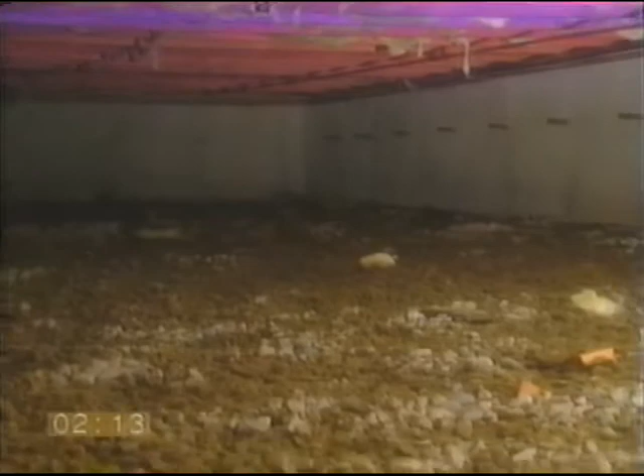For pier and beam construction, make sure the vents aren't blocked and that the crawl space has at least 1.5 square feet of venting space for every 100 square feet of floor space. You'll also need to check for a 6 mil or thicker plastic vapor barrier, either covering the ground in the crawl space or attached to the underside of the floor.

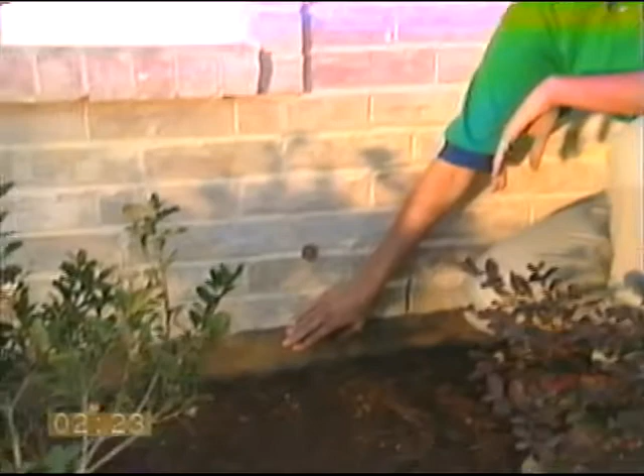Now, a concrete subfloor like the one we'll be working on sits directly on the ground, and because concrete is such a porous material, moisture is constantly absorbed up through the slab. You'll see later how we install a plastic vapor barrier on top of the concrete to protect the floor. On new construction like this, the concrete needs to cure for 60 days, so make sure you factor 2 months into your construction schedule before you install any floor. Okay. We've determined that the conditions are right for installing Pergo in this house. Let's look at our tools.

Now, you'll need a utility knife and a pry bar, a power saw, either a circular saw or a table saw with carbide tip blade, a combination square and a scriber, a hammer and a scraper, some Pergo cleaner, and a bucket of water and cleaning rags. Oh, you'll also need safety glasses. Be sure to remember these and protect your eyes. That's very important. And a tape measure, preferably one with metric measurements.

Well, you're right about that, Jack. It's really handy to use metric measurements because Pergo planks are exactly 20 centimeters wide and 120 centimeters long, and it's a lot easier to do the math than working with fractions of inches. The planks are 7 7/8 inches wide and 47 1/4 inches long.

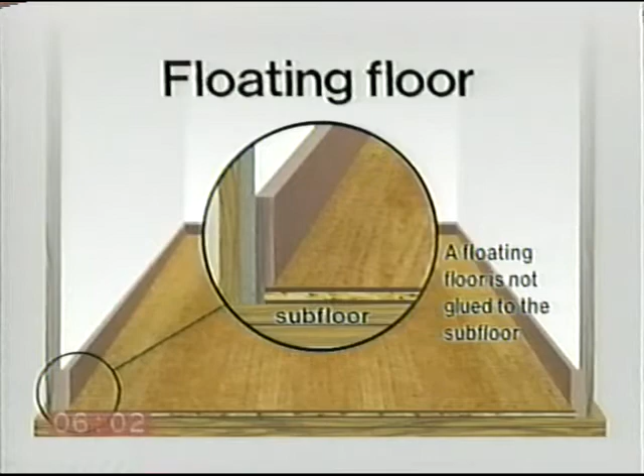The only thing holding a Pergo floor down is gravity. It's called a floating floor, which means it just sits on top of the subfloor. This makes it very easy to install, remove, or repair. And since Pergo is made primarily from wood-based materials, it's always expanding and contracting with changes in humidity. This is allowed for by a 1/4-inch expansion space around the edge of the floor, and anywhere else the floor meets a fixed object. The space allows the floor to float.

Even though this constant movement is imperceptible to the human eye, your Pergo floor will actually travel 140,000 cumulative miles over the life of the floor. He's only kidding.

Anyway, the glue is not used for gluing the floor down. It's used to glue the plank's tongue and groove edges together. And you have to use the Pergo glue for the 15-year warranty to be valid. You're probably also going to need some Pergo sealant or other 100% silicone sealant, and that's something we'll need to talk about later.

Shall we? After you.

We're planning to install Pergo in this kitchen, so the first thing to do is decide which direction the planks will go. There's really not a right or wrong direction. It's just a matter of aesthetics, what looks best. Yeah. So the first thing to do is determine which direction light usually enters the room. Generally, the flooring looks best if the planks are installed parallel to the incoming light.

Now, the exception to that rule is a narrow space, such as a hallway. You'll usually want to install Pergo lengthwise in a hall, regardless of the light source. Since we have these large windows in the breakfast area letting light flood the room, we'll lay our planks in this direction. Now that we've determined that the length of the planks will run the length of the room, let's measure the width.

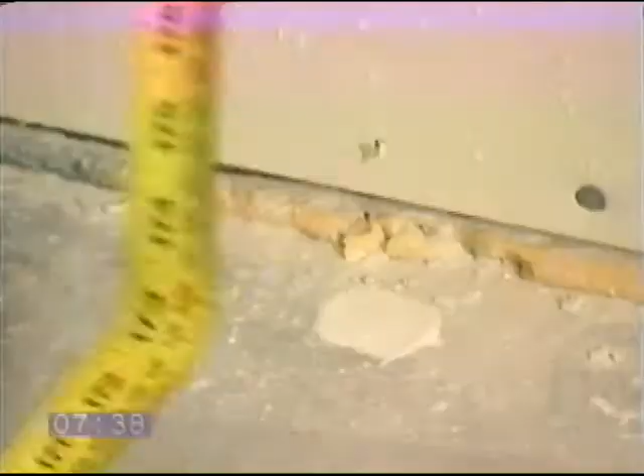Okay, that's 14 feet 9 inches at the widest point. Now you'll see what I meant about how much easier it is to work in metric measurements. So Jack, what's the width in centimeters? Okay, that's 450 centimeters. To determine how many rows of planks it'll take to cross the room, you divide that by the width of a Pergo plank, which is 20 centimeters. A lot easier to deal with than dividing 14 feet 9 inches by 7 7/8 inches.

It sure is. Now, the reason we start out by taking this measurement is to determine how much we'll need to cut off of the planks in the last row. Ideally, you should not have a plank that's less than 5 centimeters or 2 inches wide. If the room measurement indicates you'll end up with a space that's smaller than that, you'll need to cut the planks in the first row so that the last row won't be so narrow.

And at this stage in the planning, you need to decide which trim and finishing components you'll need. Take note of the trim and molding section of this tape and plan early on which strips you'll need. You also need to calculate how many cartons of Pergo you need. To determine the number of cartons, we've divided the room into rectangles and squares. We've taken the square footage of each area, added them together, and then we add 10% to the total square footage, or a little more for complicated floor plans or when laying the floor diagonally. This covers any miscuts and normal waste.

Each carton will cover 20.67 square feet or 1.9 square meters of floor. So once you have your total area, plus the 10%, divide by either 20.67 for feet or 1.9 for meters, and purchase that number of cartons, rounding up to the nearest number.

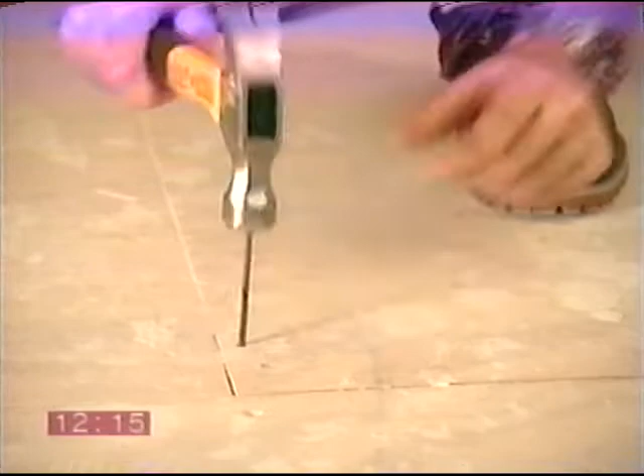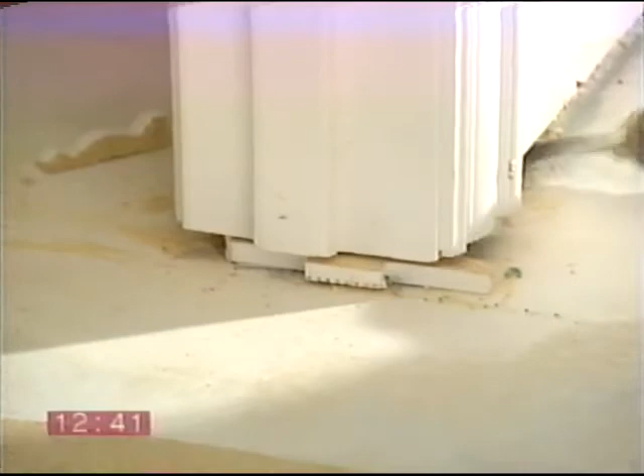Moving right along, let's make sure the door frames are ready. To do this, use a piece of Whisper Walk or underlayment foam and a loose plank placed upside down when sawing, like I'm doing here. Just undercut the door frames and casings so there's enough room to slide the flooring underneath. Since we're also installing Pergo in the laundry room, we've cut the jambs and door stops.

Now we're ready to talk about the underlayment. We Pergo installers really love our underlayments. Whenever there's a concrete subfloor, even if it's covered with vinyl, linoleum, or tile, you must cover the subfloor with a layer of Pergo 6 mil polyethylene film. This polyfilm forms a vapor barrier to keep moisture from reaching the underside of your Pergo flooring. But you should never put polyethylene film over wood or any other organic material. It can trap moisture and cause mold or mildew.

But what if you have hardwood over concrete? I know that you know this, Karen, but it's a good idea to restate the fact that you cannot install Pergo on top of wood that has a concrete subfloor. The wood has to be removed first, then you use the polyfilm as a vapor barrier over the concrete. Just trying to trip you up there.

Now, there is the possibility that there might be too much moisture in the subfloor, so you should do a little test first. Check the moisture level by taping down a piece of polyfilm about 3 feet by 3 feet, or 1 square meter, in 2 or 3 spots. A rubber-backed mat will work too, and wait 72 hours. When you check back, if you see darker concrete under your cover, or if the plastic has become cloudy, or if you see moisture condensation, then you have a subfloor with an overly high moisture content. In this case, ask your retailer or call 1-800-33-PERGO for assistance.

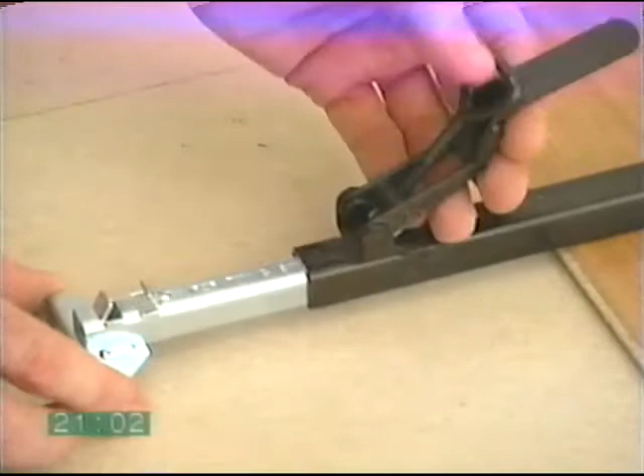This is an installation clamp designed to set up the first 3 rows. At the back of the clamp is a distance spacer. You can adjust this to create a 1/4 inch or 7 millimeter expansion space. And this is the foot, which fits against the plank. In the front is this wing bolt that you can turn to make fine adjustments. The clamp is designed to hold 3 plank widths together.

If you reduce the width of the first row, like we've done here, save the piece you cut off and place it at the head of the clamp on the 3rd row, like this, then make your fine adjustments. Usually you'll use 2 clamps per plank length. Here is the Pergo installation strap. You thread the strap into the ratchet this way.

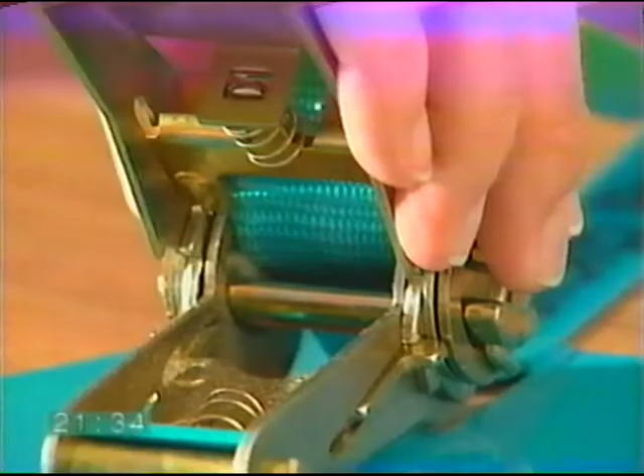Pull the strap tight, then move the handle to create more tension. To release the ratchet and loosen the strap, lift up the plate and move the handle forward. Now place your thumb on the lower plate, release it, and pull forward to the next plank. Once you're satisfied that everything's in good shape, it's time to lay these planks in for real.

Jack, let's get out the glue. Remember, the Pergo warranty is valid only if you use Pergo glue. Just cut the nozzle off the glue bottle so you get a good healthy bead of glue to fill in the groove. Okay, lay the first plank back in place. All right. Remember the spacers on the side and the end. Now, glue the second plank of the first row in place. Don't be stingy with the glue either.

Now glue the first plank of the second row in place. When you press the planks together, make sure excess glue squeezes up out of the joint. Pull the planks together tightly to create a watertight seal. Use the tapping block and a hammer to lightly tap the ends together. It's very important to clean up the glue as you go. Move to the 3rd row. Remember the pattern? And glue the first plank in this row.

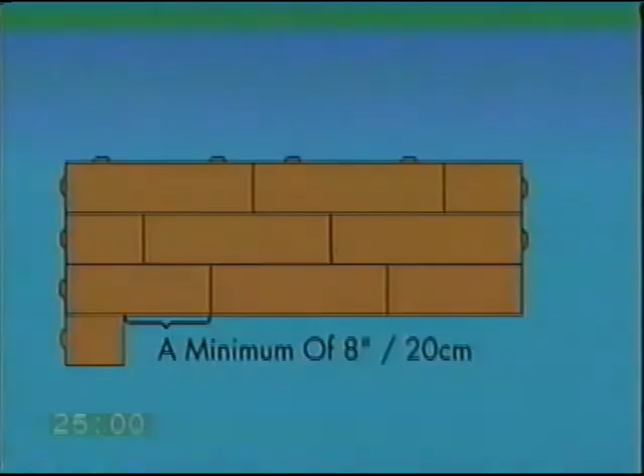Now, before we go any further, we must take care of spaces like this one. This is one of the conditions where Pergo loose tongue can be used. Cut and fit in dry the loose tongue here and here. Then dry fit Pergo planks to the backstop here and to the wall here. Remove the dry fitted planks, glue in the loose tongue.

We use the loose tongue so that we may pick up the plank, see the groove, and be sure that we are filling it up with glue properly. Otherwise, we'd have to fill the groove from the floor, which is awkward. Glue and fit each piece into place using the installation straps to squeeze the joints tightly together.

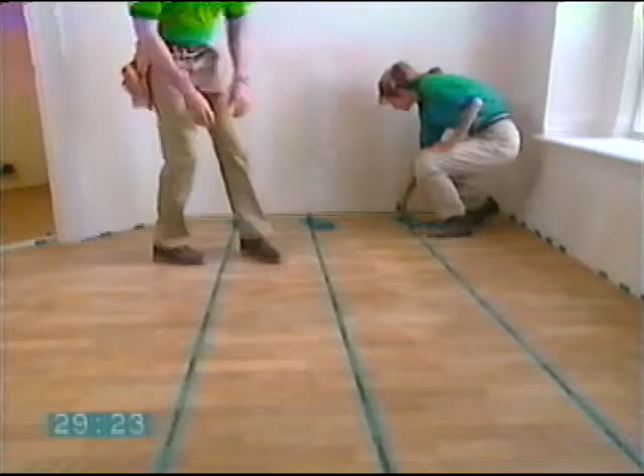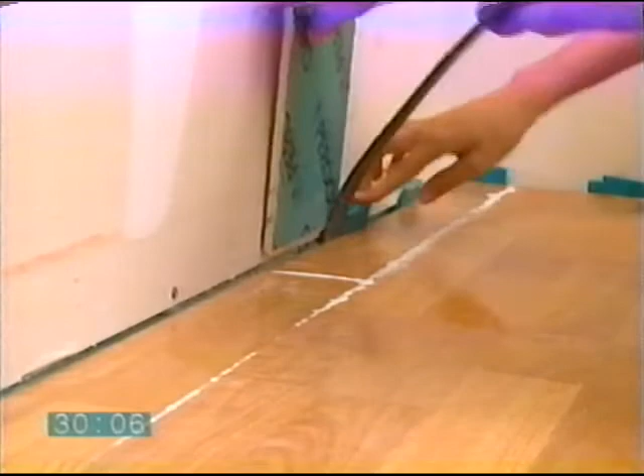Okay, we've worked our way over to the opposite wall. At this point, you'll have to trim the last row lengthwise. And as always, we'll maintain an expansion space at the wall. This is not as tricky as it might seem. Just lay the last row of planks on top of the next to last row, matching the edges. Use a full width of plank with tongue to trace the wall contour along the final row. Saw the planks, cutting off your pencil line. Glue the last row in position. Wedge it in with a final row of spacers along the wall.

Now, step back and look at what we've done. Looks good, doesn't it? Well, don't celebrate yet. We're not quite finished. Allow the glue to dry for 12 hours, then you can remove the spacers and install the molding and trim.

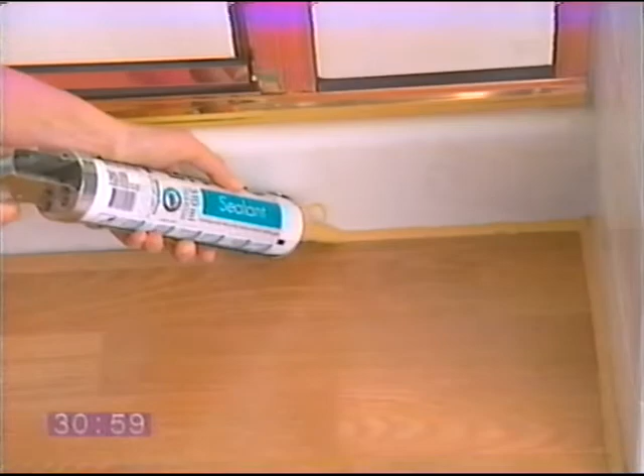One of the greatest things about Pergo is that it's perfect for use in kitchens and bathrooms, rooms where cleanup of other types of flooring can be such a chore. In bathrooms, you simply use the sealant to fill the expansion space around the perimeter of the room, and around the flange for the toilet. You can use an end molding against tubs or shower basins. Pre-cut the end molding, fill the expansion space with sealant, and then press the end molding into place. Clean up the excess sealant with acetone.

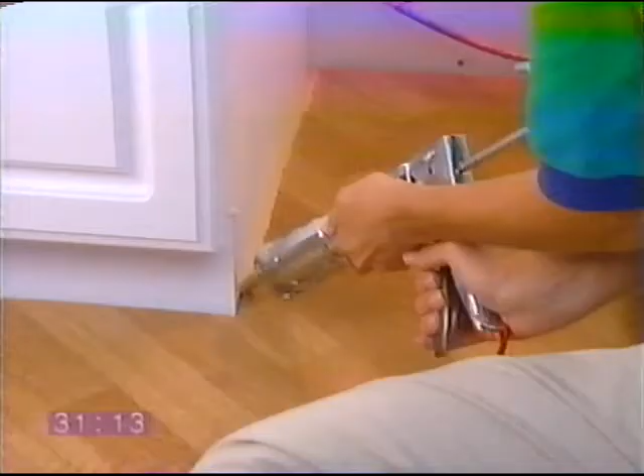In the kitchen, use the sealant around the dishwasher compartment, or in front of it if the washer is already installed, and run a bead of sealant in the expansion space along the cabinet where the kitchen sink is located. Fill the expansion space around the refrigerator area and seal around any water supply line, such as for the ice maker, which may come up through the floor. In the laundry room, seal the expansion space.

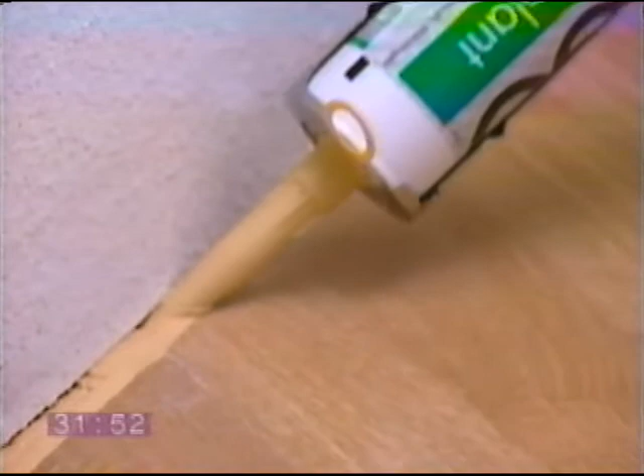By the way, we do not install Pergo in any room with a floor drain. Naturally, any floor is susceptible to damage if there's flooding. Use Pergo sealant or another 100% silicone sealant. It remains flexible and elastic so the floor can still expand and contract.

Pergo makes a complete line of finishing moldings. The wall base and quarter round are color coordinated to beautifully finish out the room. Pergo also makes T-molding for transitions between two areas of Pergo flooring, reducer strips for transitions from Pergo to other flooring materials, end moldings for use against thresholds, ceramic tiles, sliding doors, and bathtubs, and stair nosing for use on stairs and steps. All these laminate moldings are color matched to Pergo designs and are as durable as the floor itself.

When the floor is finished and has set for 12 hours, you can install the trim. When two Pergo surfaces meet, like in a doorway or narrow archway that's no more than 4 feet wide, you'll bridge the gap with a laminate T-molding.

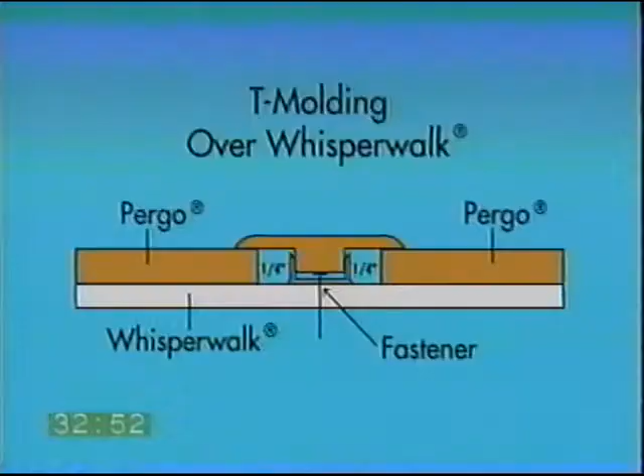We've cut a 1x2 wood spacer strip, which is 3/4 of an inch wide. It has a 1/4 inch space at each end. The strip has been positioned where the T-molding will go. It's been centered in place and screwed down for easy removal later. At that point in the installation, we used the thin side of one of the spacers and installed right up to the block. Remove the spacers and the strip

and secure a piece of metal track in the center of the open space. When using foam as an underlayment, fasten the metal track directly to the subfloor. When using Whisper Walk, fasten the track on top of the Whisper Walk. Run the screws through the Whisper Walk into the subfloor below. Cut a strip of laminate T-molding.

Check the track and be sure it is not bent anywhere. Lift the molding up at a slight angle. Working left to right, squeeze the molding into the track. Once it is fitted into the track, it cannot be removed without causing permanent damage.

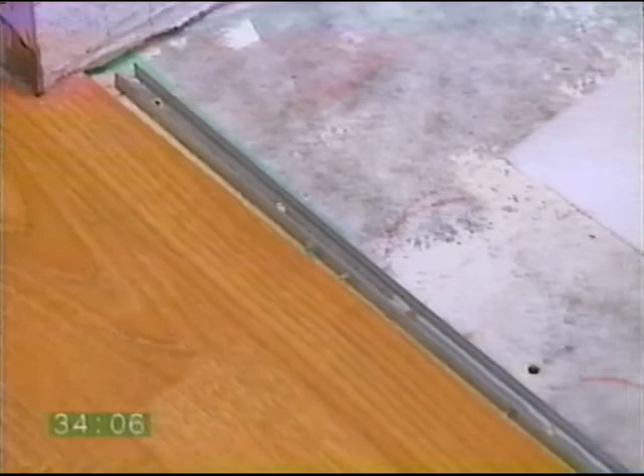When Pergo meets another floor surface that's lower than the Pergo surface, like carpeting or vinyl, use one of the reducer strips. It goes in just like the T-molding strip. Remember, when using foam, fasten the track on the subfloor. When using Whisper Walk, fasten the track on top of the Whisper Walk. Squeeze into the track by pressing left to right.

Here are two ways to finish the end of a wall base or quarter round. To cut a return, just cut a 45-degree angle at the end of the molding. Then cut another 45-degree angle at the end of another piece of molding, just as if you were going around an outside corner. After you have cut the second piece, adjust the miter saw so that you can make a 90-degree cut. Carefully cut the small piece at 90 degrees, like this.

Then take this small piece, the return, and glue it with a dab of construction adhesive to the end of the molding and fasten the molding into place. Then we countersink the nail holes and fill the holes with finishing putty, used without the hardener. Do not use acetone for cleanup on the wall base or quarter round.

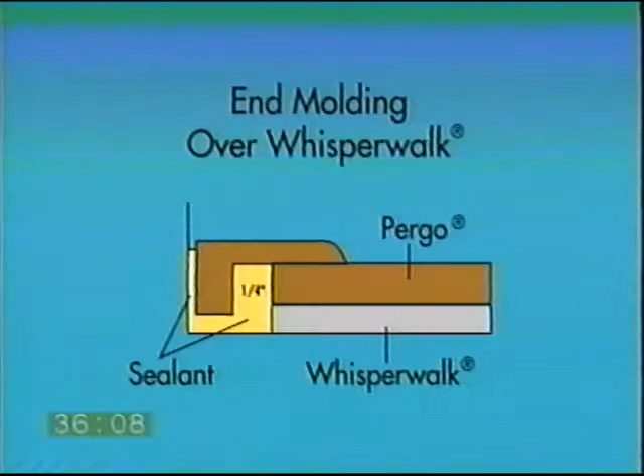End moldings finish Pergo floors when they meet vertical thresholds like this exterior door, as well as sliding glass doors, tub or shower basins, raised hearths or sills. Fasten with Pergo sealant.

Stairs are the only time you will actually secure Pergo to a surface, in this case the tread and/or riser. There are a variety of stair conditions you might come up against. Make sure the stairs are in good condition. Loose treads or risers need to be replaced or securely repaired. Clean the stairs thoroughly as well. Scrape up any loose paint, debris, or old adhesives.

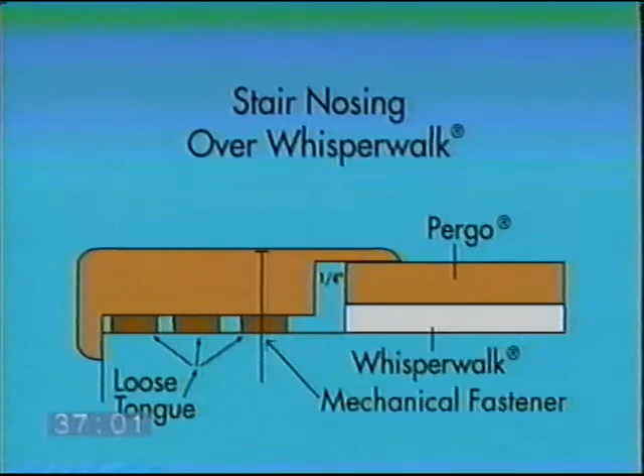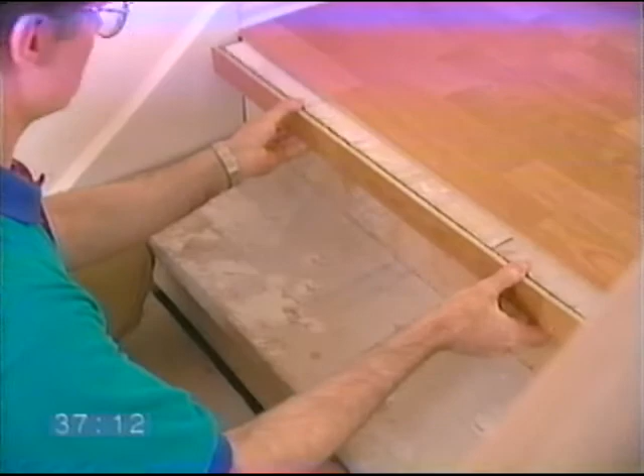Let's look at how you maintain that floating floor concept at the top of the stairs. Special stair nosings from Pergo allow the floating floor to slide right up underneath them. Like our other moldings, they conceal the quarter-inch expansion space. First, attach a piece of Pergo cut to cover the end of the step. When using Pergo foam as an underlayment, attach the stair nosing directly to the subfloor.

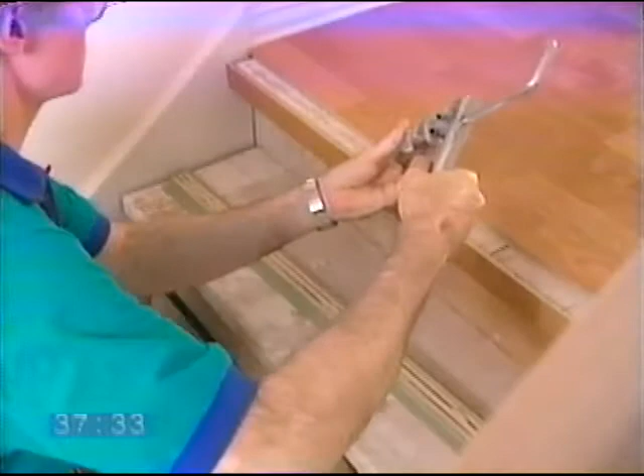When using Whisper Walk, you need to shim the stair nosing to accommodate for the thickness of the Whisper Walk. You can use Pergo loose tongues. Adhere several strips of loose tongue to the bottom of the stair nosing. Then fasten the nosing using a quality construction adhesive. You must also nail or screw the nosing into place.

Mark the nosing before drilling for at least 4 nails or screws every 3 feet or 1 meter. Place clear tape on the surface of the nosing. Drill the holes, then set the nails and countersink. Always install stairs from the top down. Squeeze 3 beads of quality construction adhesive along the length of the tread.

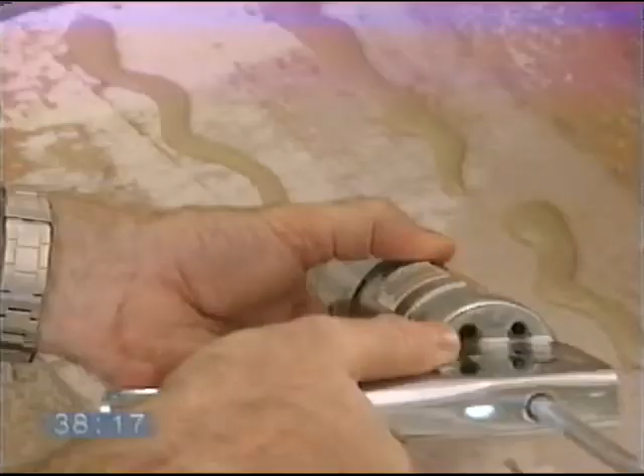Spread the adhesive evenly. When pre-cutting planks for treads, add the thickness of the Pergo plank on the step edge to the depth of the tread. Then deduct 1 5/8 inches, or 40 millimeters, to allow for the stair nosing. The tread will require 2 planks. The piece left from the second plank can be used for the riser. Glue the 2 Pergo pieces together at the tongue and groove using Pergo glue. Place the seam at the back of the tread, then press firmly to seat the plank into the adhesive.

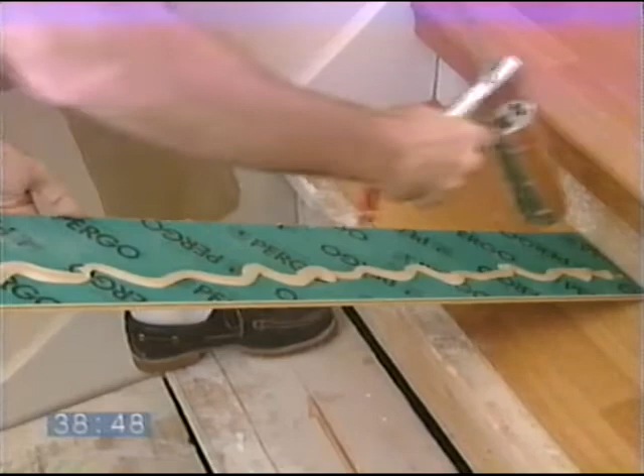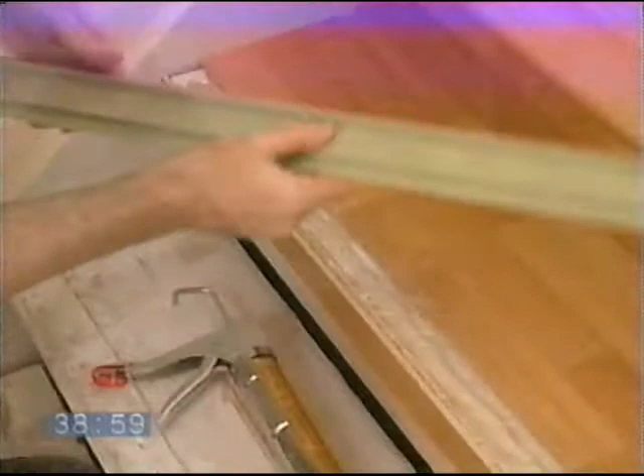Wipe off excess glue at the joint. Spread the adhesive on the back of the Pergo plank cut for the riser. Then press it firmly onto the riser, making a tight fit to the tread. Next, fasten the narrow strip of Pergo to the step edge. Finally, fasten the nosing using construction glue and nails or screws, and countersink.

Finish all the treads. Then, with clear tape in place, fill the holes with color-coordinated Pergo finishing putty. Remove the tape. Avoid walking on the stairs for at least an hour.

Here's where Pergo really shines. Nothing could be easier to clean and keep beautiful. You're right, Karen. Let's start with the first cleanup, right after installation. Use Pergo cleaner. Just spray lightly on the floor and wipe, or use a solution of 1 cup vinegar or half a cup of ammonia per gallon of water. This will easily clean up the residue or glue haze left on the floor.

To remove the glue haze after installation, damp mop several times with one of these solutions, then drop a bath towel on the damp area and use the mop to buff dry the remaining water residue. This speeds the removal of the glue haze. And while you shouldn't have any droplets of hardened glue, if you do, just dampen a cloth with 100% acetone and wipe. Don't worry about harming the finish. This is a Pergo floor. It can take it.

Then, as you live on your Pergo floor, just clean by sweeping. Or you can vacuum, but only if the vacuum doesn't have a beater bar. In case you're wondering, this is a beater bar. It's easy to care for your Pergo floor. For spills and messes, just wipe with a damp cloth or use a damp mop. You can also use Pergo cleaner, but do not use soap or detergent on Pergo ever.

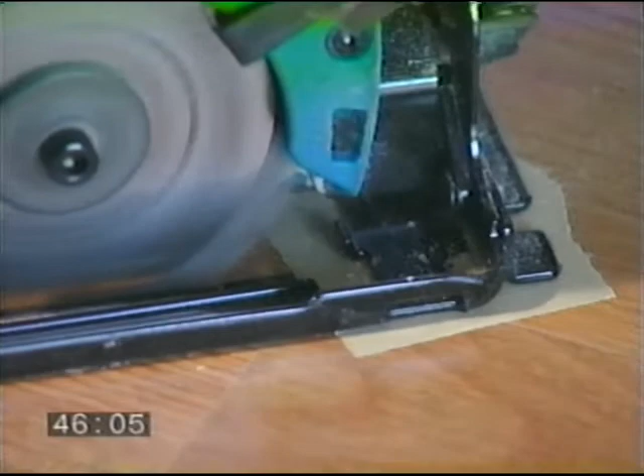Set your sawing depth to 8 millimeters. Cover each corner by 1/8 of an inch, or 3 millimeters, with masking tape. This is your stop guide for sawing. Carefully cut all the lines. Remove the pieces, starting with the ones in the center.

Gently lift the existing adjacent plank and prop it up with a block of wood, placing the edge of the wood block at the edge of the joint. Press the cut piece down, breaking the tongue, and then pull up, just a little, and wiggle until the piece breaks free. Repeat this action for all of the pieces. Cut out corners carefully.

Vacuum up the broken pieces, being sure to keep everything clean, so you don't let any pieces get under the existing floor. If the underlayment is Whisper Walk, leave it in place. If foam is the underlayment, carefully remove it without damaging the vapor barrier. If there is, make sure the plastic vapor barrier is smoothed out and flat so the milling tool won't damage it. Take your chisel and remove the broken tongue.

You can take a scrap piece of plank and place it under the existing floor to make it easier to move the chisel. Adjust your milling tool on your router and mill a scrap piece of plank. Test fit it to the replacement plank. Now set the router on the existing floor and proceed to mill the groove. Cut and fit one long, loose tongue and one short, loose tongue. Sand the ends of the loose tongue so they will fit into the corners.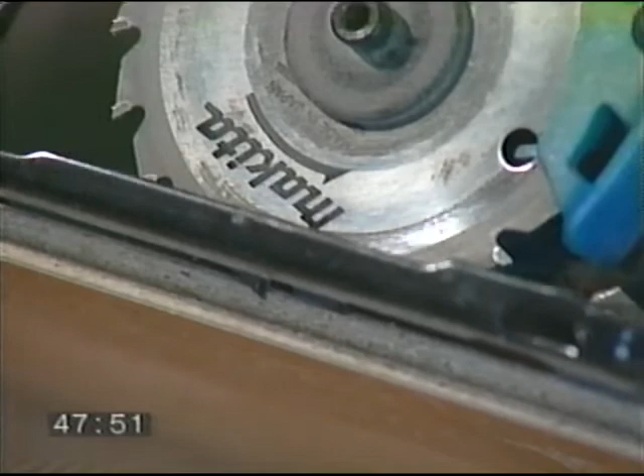Prepare the replacement plank. Mark the back side of the plank. Adjust the depth of the saw blade and cut to remove the underside of the groove on the long and the short side. Smooth the cut edge. Remove 1/4 of an inch of the existing tongue at each corner of the plank. Now dry fit the plank, checking all of the joints for an even fit. Next, remove the plank with a suction cup.

Take out the loose tongue and place paper strips under the joints. To replace the loose tongue, begin by filling the groove with glue. Then press the tongue to the back of the groove. Remove the excess glue from the top of the tongue. Glue the remaining grooves. Then apply a bead of glue on top of the loose tongue. Okay, now it's time to fit the replacement plank into place.

Press to force the excess glue up to the surface. Clean off the surface glue. Weight the plank carefully until all of the joints are even. Caution the homeowner to avoid walking on the replacement plank and adjacent area for at least 12 hours. Remind them when they remove the weights, the joints will be swollen. This swelling will disappear within 4 to 6 weeks. So, that's how it's done.